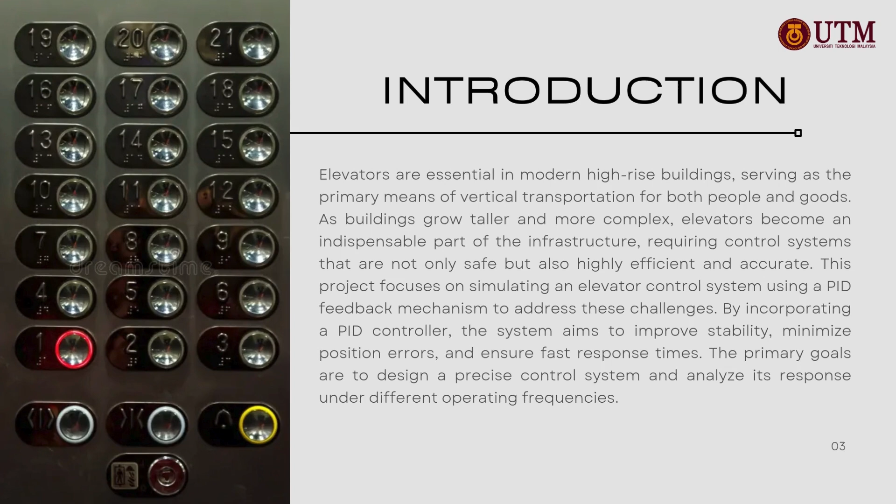The central problem of our project: modern high-rise buildings require efficient and reliable elevator systems to ensure safe and comfortable vertical transportation. However, elevators face dynamic forces that can cause oscillations, delays, and inefficiencies. Traditional open-loop control methods are inadequate for managing these complexities, so PID control is used to provide real-time feedback and

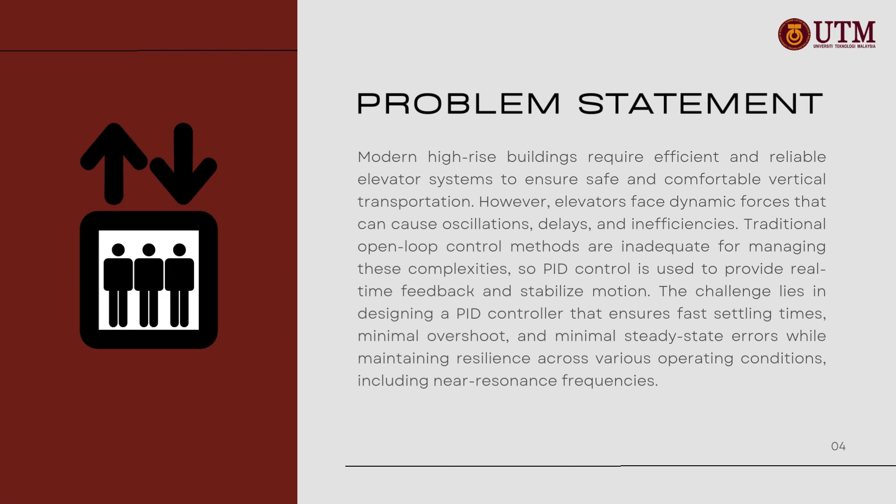stabilize motion. The challenge lies in designing a PID controller that ensures fast settling times, minimal overshoot, and minimal steady-state errors while maintaining resilience across various operating conditions, including near resonant frequencies.

Objective 1 is to design a PID system for precise position control. This objective centers on developing a control system that enables the elevator to precisely track the desired position input. Utilizing a PID controller, the system seeks to reduce position error, minimize acceleration, and ensure good settling time.

And the second objective is to analyze the dynamic response of the elevator system by varying the PID parameters and actuator force. This objective aims to evaluate the system performance by adjusting PID control parameters and varying actuator force level.

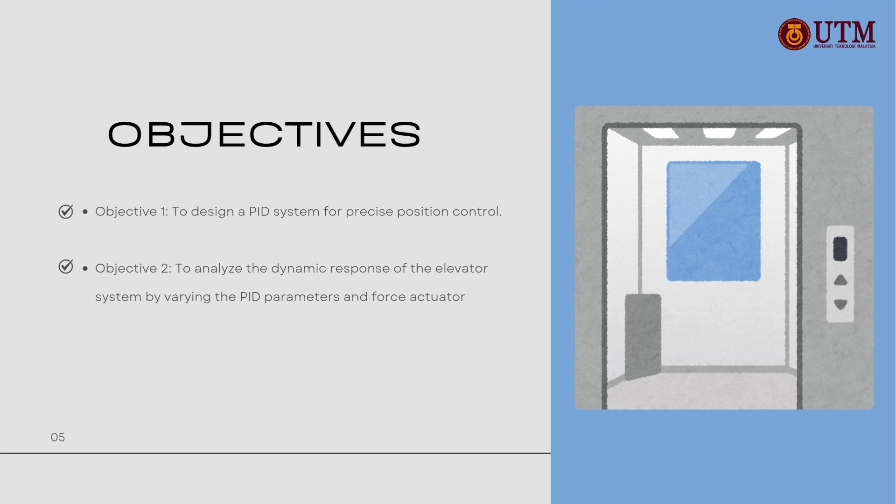Now we move on to the methodology and result. This model simulates an elevator system where a PID controller regulates the position of a mass by generating a force input through an actuator. The reference position sets the desired floor level, while the feedback loop continuously measures the actual position

using a position sensor. The actuator force moves the mass against the combined effects of a spring damper, which represents the mechanical suspension and damping of the elevator system. The fixed point anchors the system, ensuring realistic spring damper behavior.

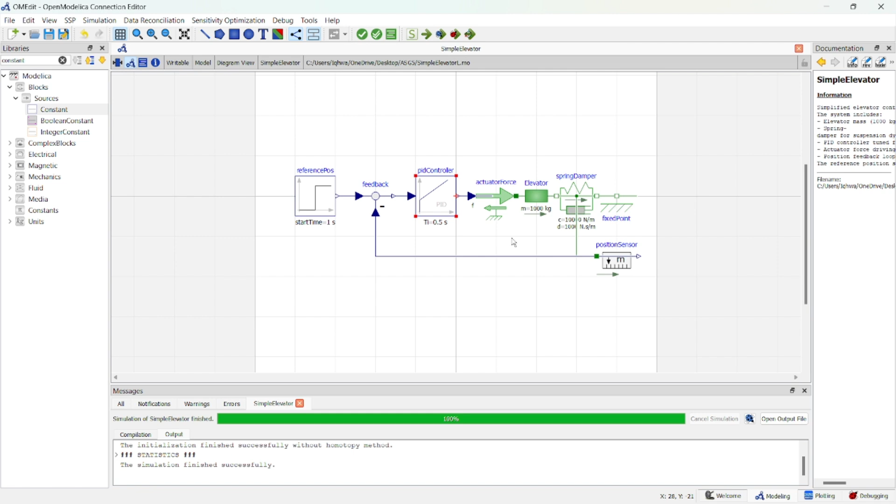This configuration allows the model to mimic the dynamics of an elevator, controlling smooth movement and stopping at precise positions, also handling external disturbance. For the initial condition, we set 5000 as the gain, 0.5 as the time constant of the integrator, and 0.1 as the time constant for the derivative block.

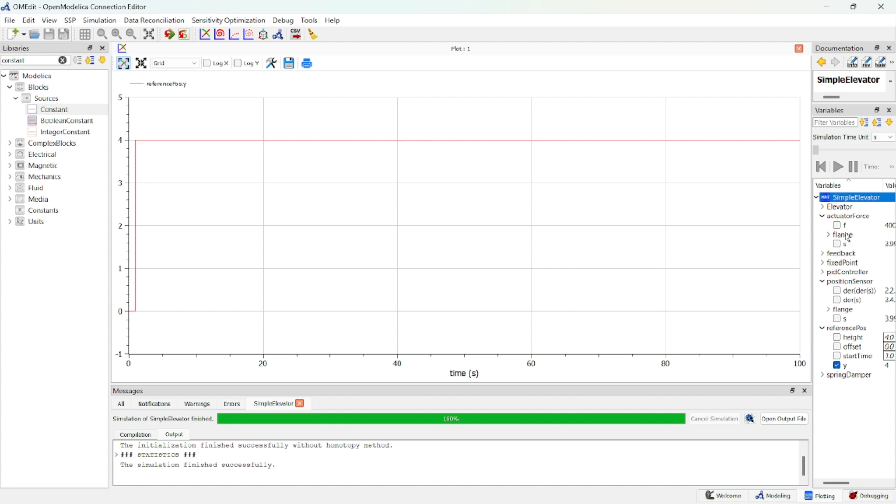For the stop time, we set it to 100 and the number interval is 1000. For plotting the graph, we highlight the reference position as the value that we need to achieve, and for the position sensor, we want to monitor the position of the elevator.

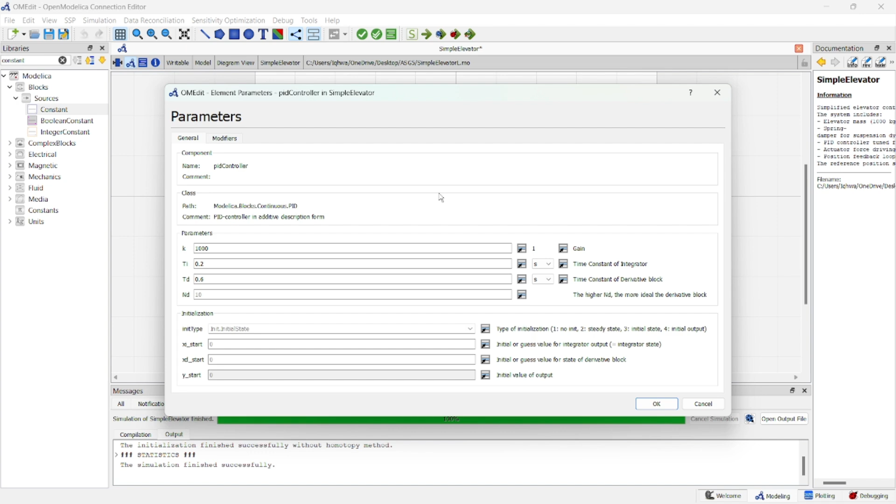This tuning approach helps minimize overshoot and oscillation in the elevator's response, resulting in smoother and more precise position tracking with reduced mechanical stress on the cable. The adjustment ensures a more robust and reliable control strategy for handling dynamic change during operation.

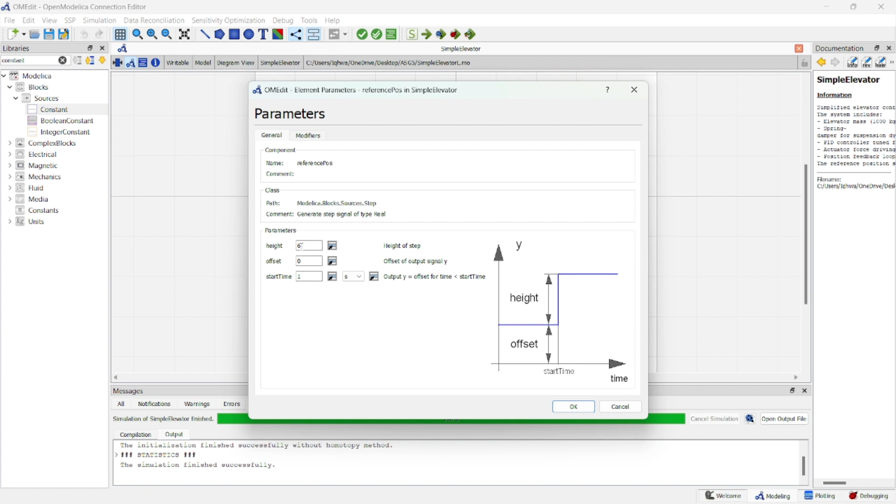To explore the system robustness, the height reference was increased from 4 meters to 6 meters. By maintaining the enhanced PID parameters from the previous tuning, the results confirm that the system performance remains consistent despite the change in the reference height.

The elevator effectively tracks the new reference position with minimal oscillation or overshoot, similar to the initial condition. This demonstrates that the updated PID parameters have achieved an optimal balance, ensuring stability and responsiveness across varying operating conditions.

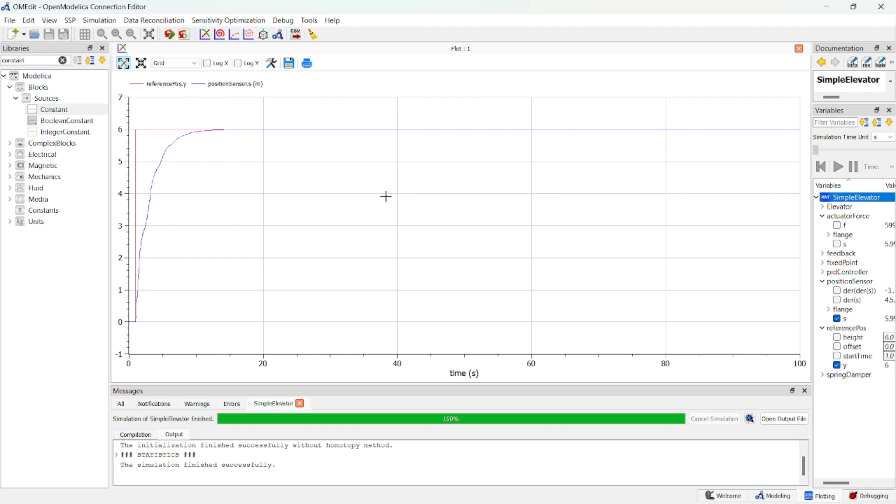Together, this analysis demonstrates that the updated PID parameters not only enhance system performance for the initial condition but also extend this benefit to varying operational scenarios. This adaptability underscores the robustness of the tuning approach, ensuring consistent and reliable performance across a range of dynamic requirements.

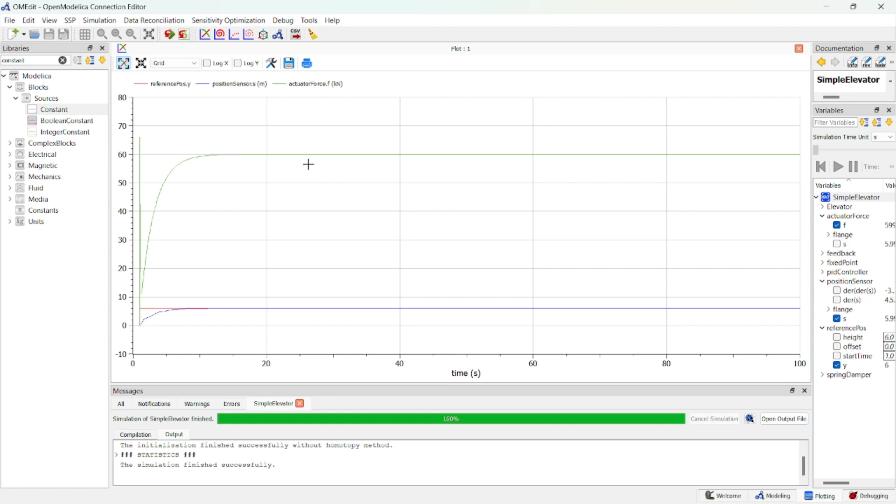So, to wrap up our project, this study successfully achieved its objective, demonstrating the effectiveness of a PID controlled system in precise position tracking with minimal errors, rapid settling time, and reduced oscillation. Through detailed analysis and optimization of dynamic response, including variations in PID parameters and actuator force, the system proved stable and reliable across diverse scenarios.

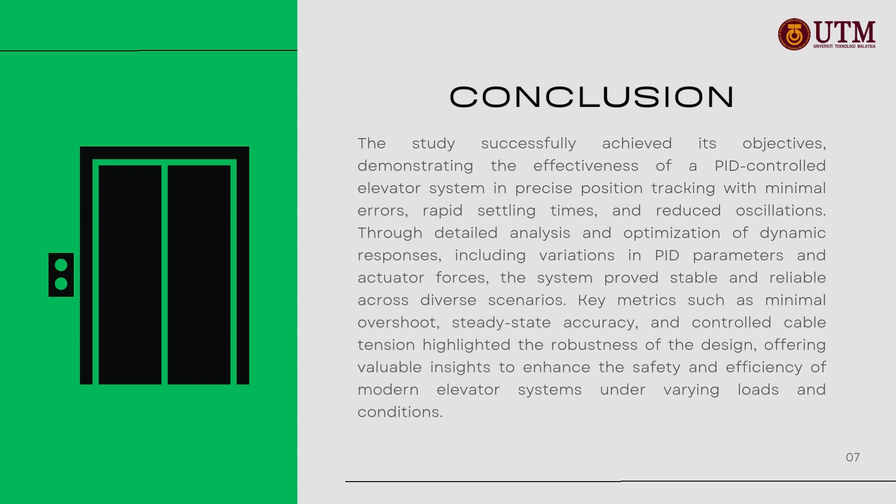Key metrics such as minimal overshoot, steady state accuracy, and controlled cable tension highlight the robustness of the design, offering valuable insights to enhance the safety and efficiency of modern elevator systems under varying load and conditions.